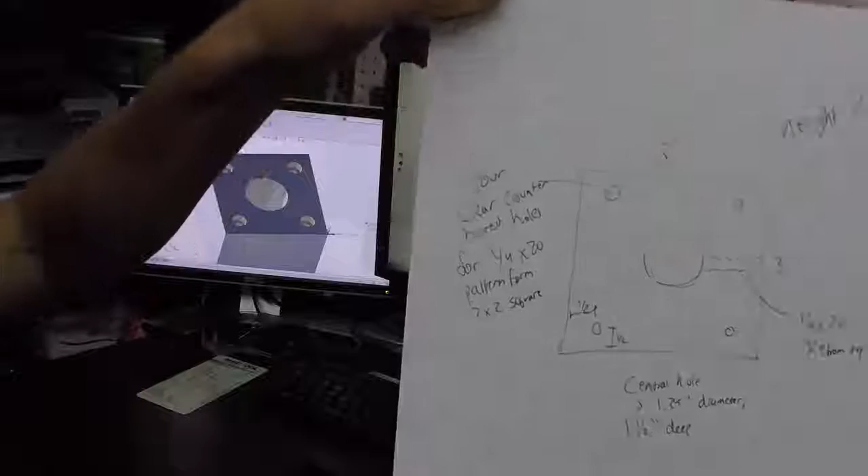We've got this part drawing right here. And this is exactly what comes in from a customer. It's not a perfect dimension, drawing, and tolerances. You've got to understand what they mean. So let's take this and let's go into Fusion 360 and let's model it up. But one of the things you've got to understand is the service you're providing.

Some of your customers aren't going to be machinists. They're not going to have perfect drawings. You've got to think for them and make sure you understand the questions. And in my opinion, you need to do that and go back to them with one set of questions. Don't come back to them 2, 3, 4, 5 times and say, hey, I keep realizing there was something missing in your drawing. It's not their fault that stuff's missing in your drawing. It's your fault if you don't go through it, completely understand it. That's why I like to model things up right away and then hit them up.

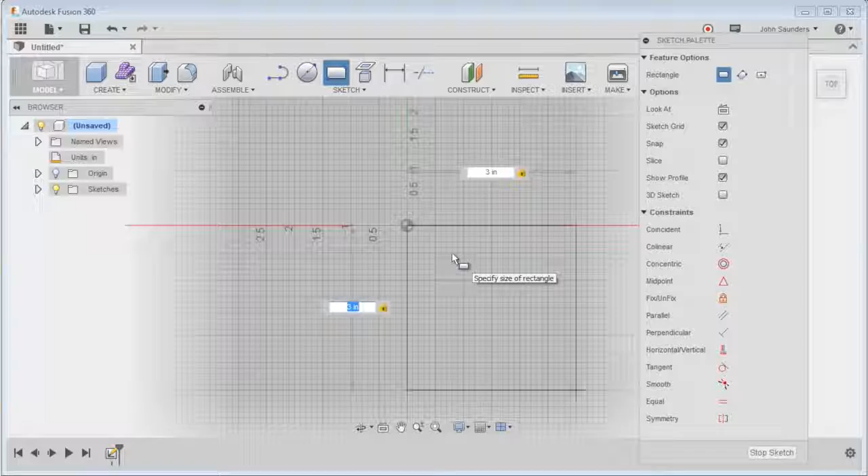Let's make the part. New sketch. Just drag here and it is 3 by 3. So I hit 3, tab 3, enter. Right click, press pull. I'm going to say this and -2. I hope that works. I forget. Yeah, there we go. Perfect. Now we've got our block that's 2 inches high. Now we're going to sketch a circle right here. It's going to be in the middle so we can actually create some lines.

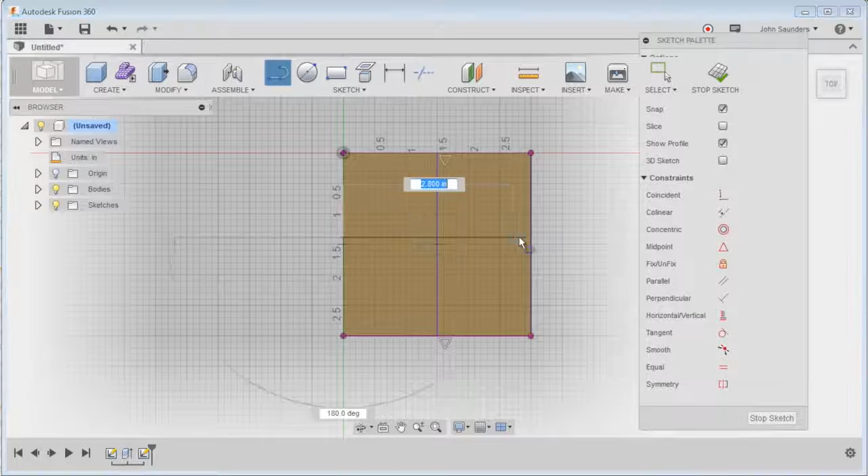Lots of ways again to do this. Oops. Kind of funny how, I mean, my videos don't bother me anymore at all, but you still get nervous.

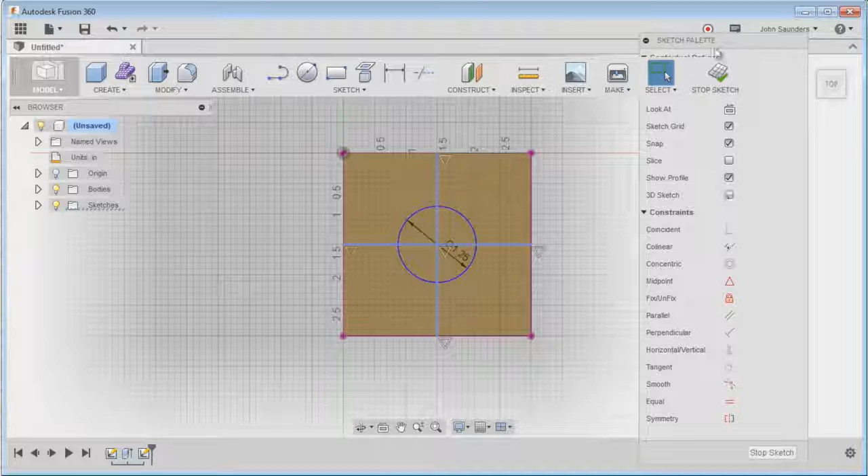So it's a 1.25 inch diameter hole. Great. We're going to click on these 2 lines and say over here for construction. Here we go. And then right click on this, press pull, and we'll say they said it's 1.5 inch deep, so -1.5. Okay, let's create those counterbore holes. The only way I know to do this is to sketch a point, which feels like it's not the right way to do it. Must be a better way.

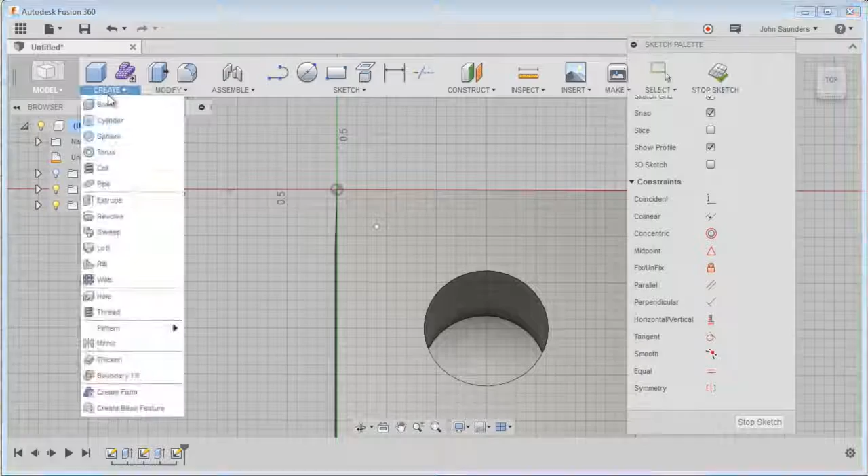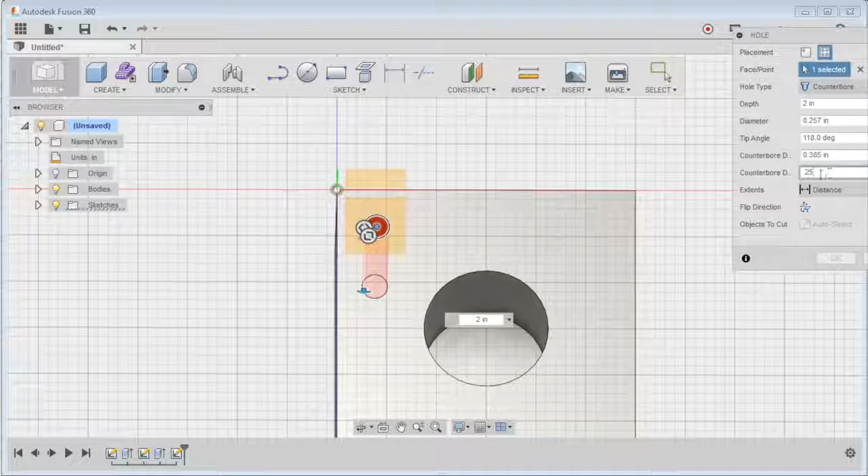But sketch a point and then do create hole, face point, choose our point, and we'll do counterbore, depth of 2 inches for 2 all the way through, diameter 0.257. We'll drill it with a letter F drill for clearance on a 1/4 inch bolt, and we know the counterbore for a 1/4-20 socket cap screw should be 0.385 and 0.25 counterbore, or sorry, 0.39. Click OK. Now you've got one all the way through.

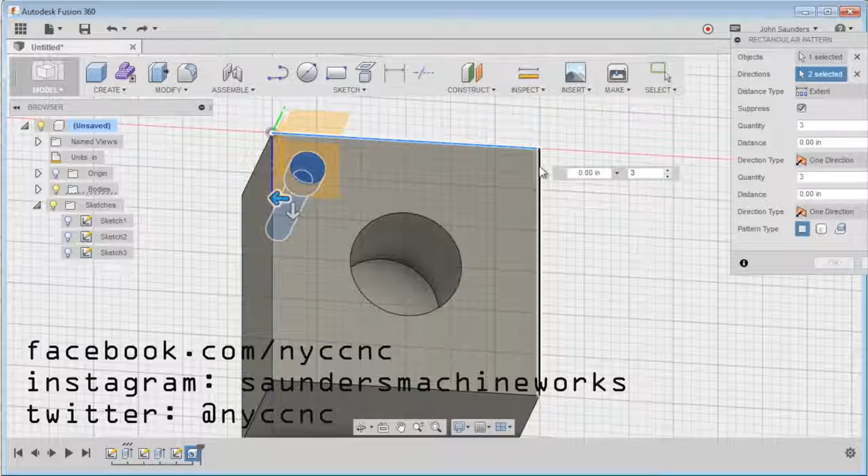Let's create the pattern. Create pattern rectangular. Now instead of clicking on it, I would suggest choosing the option down here. That makes sure you select the whole thing, and then directions. Click there. Click there, and I just go over here, quantity 2, distance 2 inches, quantity 2, distance 2 inches, and you see we're wrong there, so if we just go distance, I think -2, we'll get it over, perfect, and click OK.

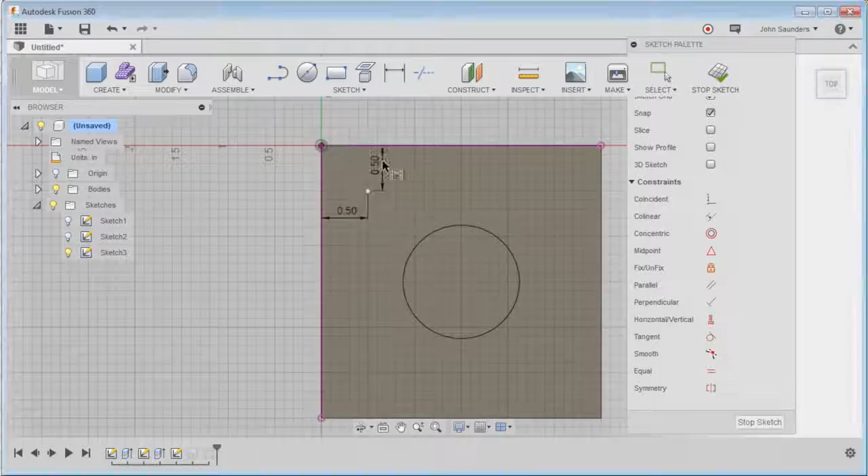Now we've got our pattern, but you see it's not centered correctly, so let's go back and right click on this sketch, edit sketch, and now we can just dimension this first hole, which we know from the drawing is 1/2 inch over and 1/2 inch down. Stop sketch. Now we've got that, and the last thing we need to do is put a hole over here.

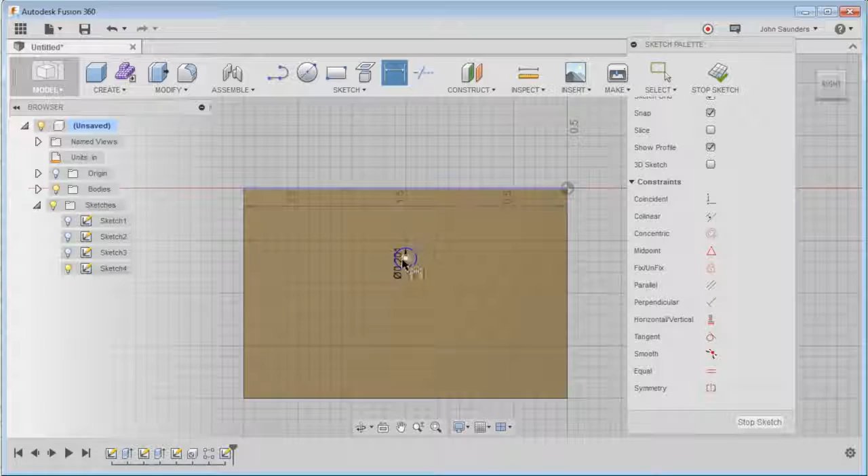So we'll do sketch here, and we'll come over to the halfway point, and that's 0.201 would be the thread, would be the drill diameter, and we'll just sketch it down 0.75 from the top, and we will then stop sketch, right click, press pull, choose that little guy, and what we can do here, it actually is kind of quicker, just go up like that, click OK. And now we've got our part model. All right, CAM.

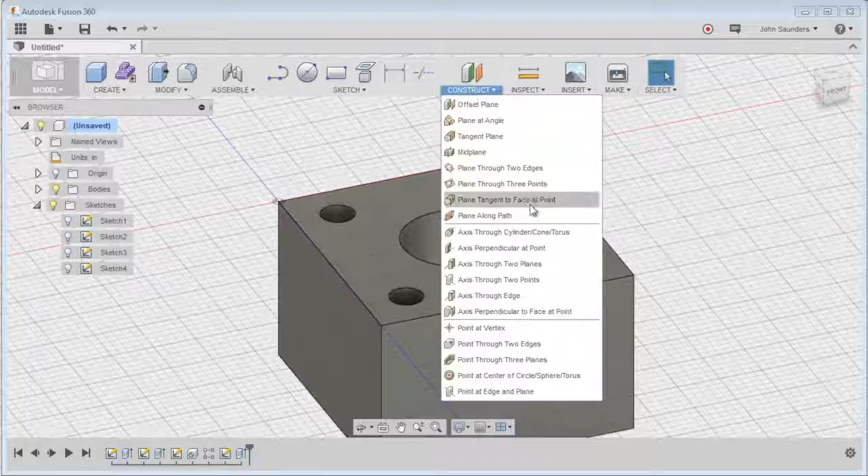I know right now I'm not happy with Fusion 360 in the coordinate system, so what we're going to do while we're still in the model is construct axis through cylinder and click right there. That creates a line right through the middle of the part.

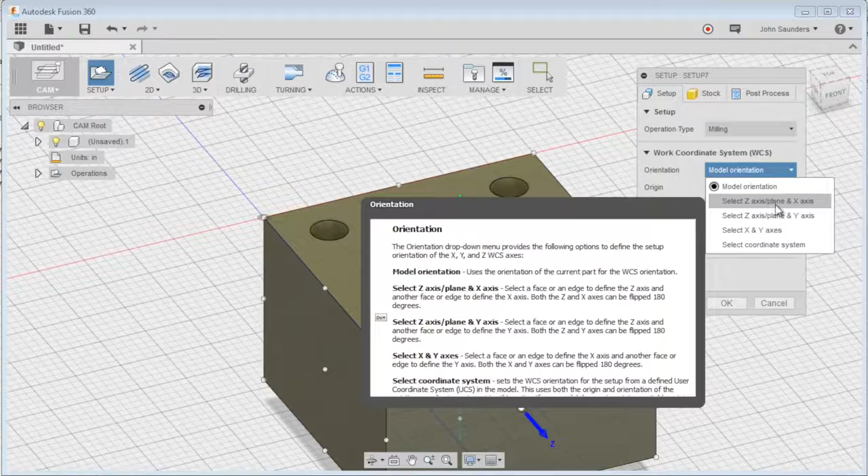Now, model, CAM, and we're going to set up a job. So click Setup, New Setup, and Orientation. I'm going to change from Model Orientation, which is somewhat arbitrary, and I'm going to choose Select Z-Axis and X-Axis. Z-Axis we know we want to be this guy, pointing down in the wrong direction. So if I click flip, that actually is exactly what I want.

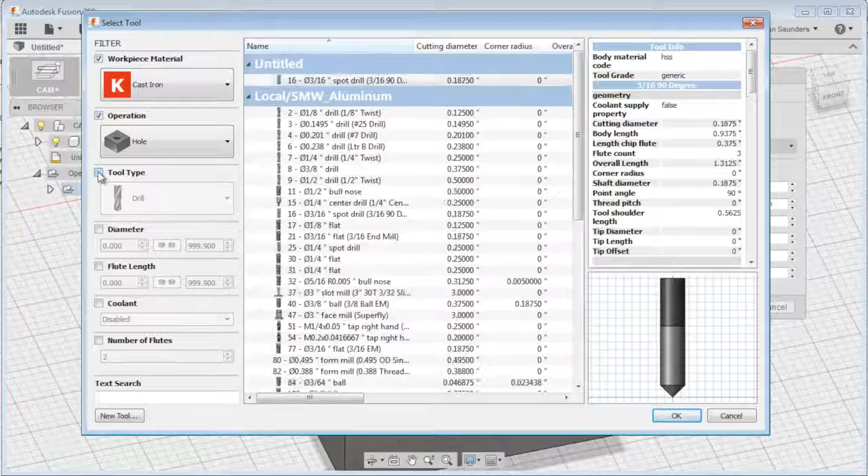It's on the top, and I always laugh, but if you kind of do point your arms up in the air and bring them down, that's Y positive and X positive. Click OK. We're going to start off with a drilling op. We're going to do tool, uncheck the filter. 16 for me is a spot drill. 1, 2, 3, 4, 5. And we're only going to feed down from hole top, negative 0.1.

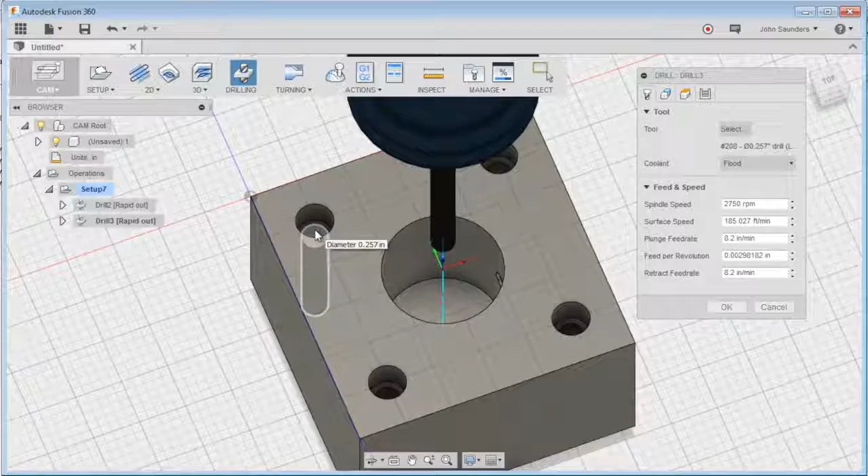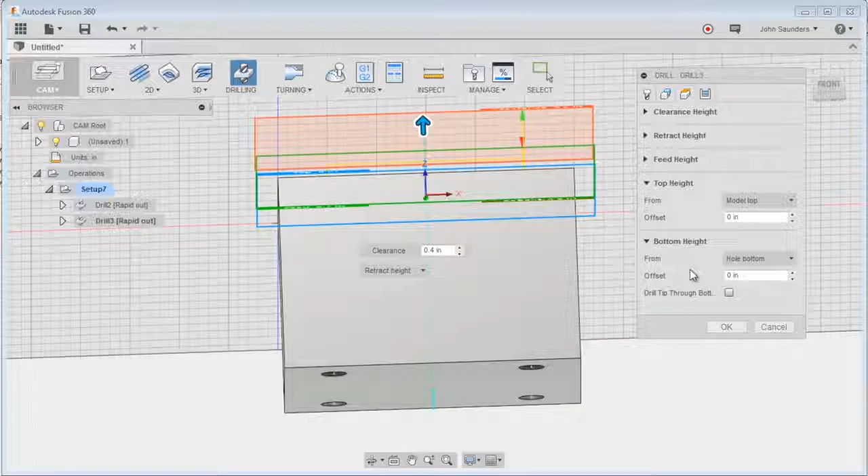Okay. Another drilling op. Tool 208 is a letter F for me. I think we might get a post issue with tool numbers above 200. We'll see. 1, 2, 3, 4. Now here I got to be careful. I want to go and change the height from the model top because otherwise it would rapid it into the part I selected, which is the 1/4 inch down, which would not be good. And bottom height, I want to go just negative 0.15 to make sure I go all the way through.

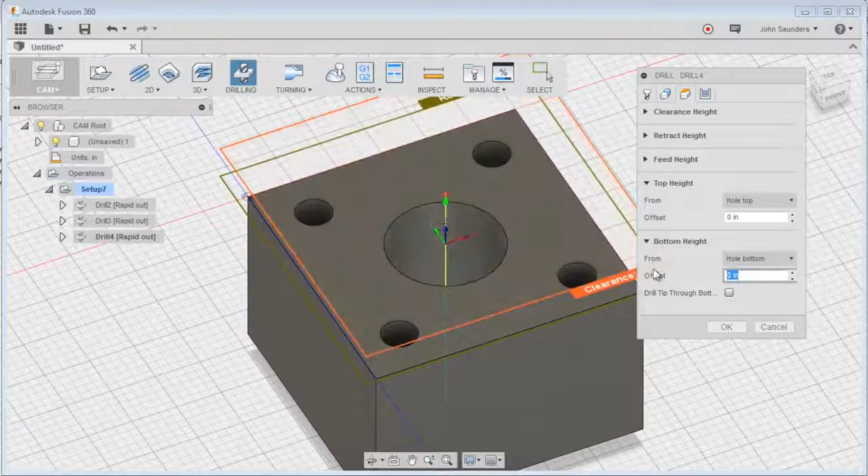I'm going to now use a 1/2 inch drill to remove a lot of the material from that center hole. So tool 9. I love this recipe. I talk about it a lot. 1175, 5.5. Click here. And what we're going to do here is hole bottom, but 0.05. We don't want to go all the way to the bottom of that hole. Leave a little bit of material. This one, we want to do a full retract. There we go. Peck of say 0.1 should be fine.

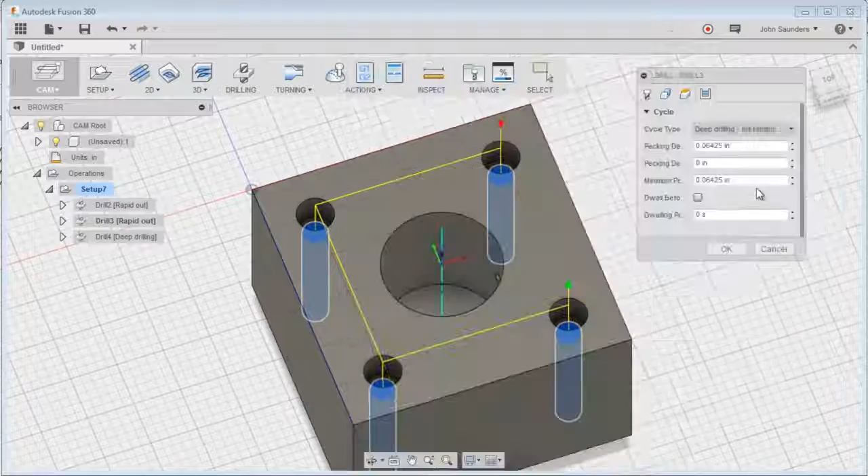Now we actually want to go back. This is very important to peck that letter F drill. I forgot that. Full retract, 0.06, that's fine. Looks like that's some formula of diameter, which is perfect.

Okay, now the next thing we've got to do is get out this material here. So let's use the hog shear. I had the tool in my SMW library, so I went to Manage, Tool Library, and I just re-imported my same library, and now that tool is there. Don't know why. Normally I felt like it updated live based on whatever was in my tool library, so I'll have to pay attention to that.

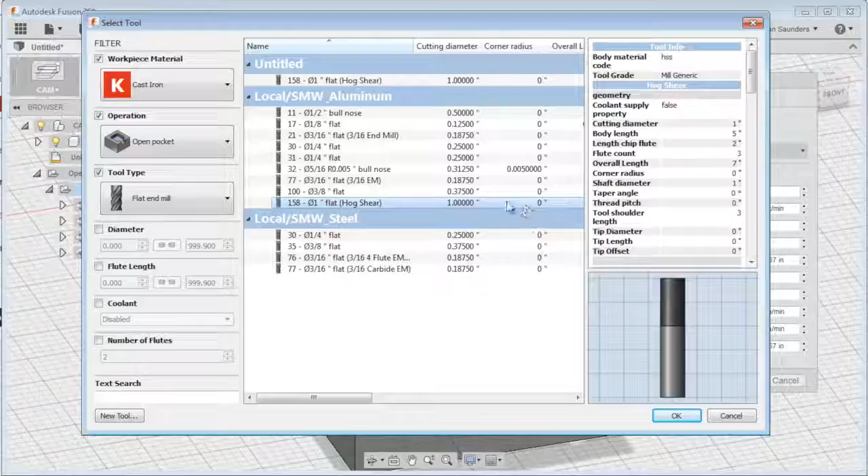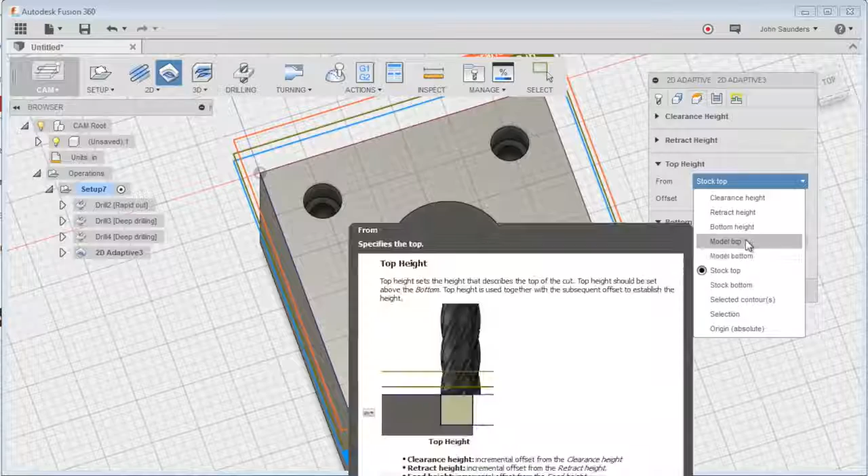But now 2D adaptive clearing, tool, and we'll check the hog shear, which, just so we see, we're going to run at 5100 and 30 inches a minute. We can plunge and ramp at the same, by the way. Should be fine. We'll choose this bottom ring here, but what we're going to do is top height, selected contours. I hate stock top. Model top makes me feel better. And we will do stock to leave 0.010. Now, I'm probably not going to get a tool path.

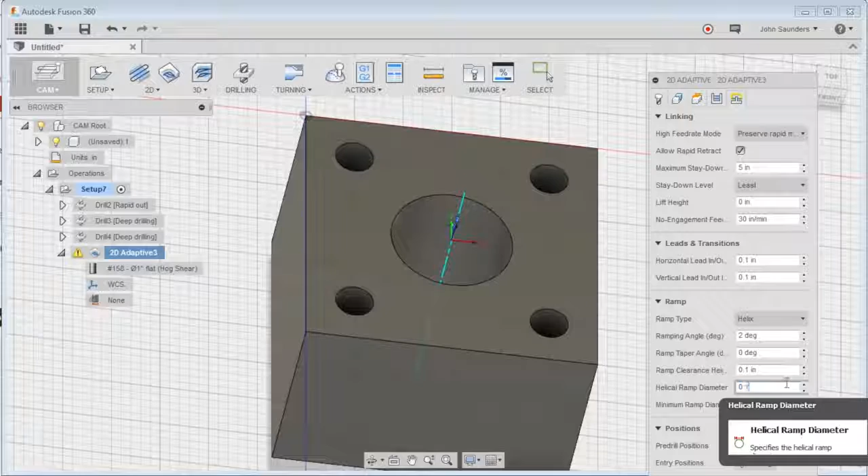Right, because it's trying to ramp in at too wide a radius. So if we go down here to the ramp helix, we've pre-drilled this to 1/2 inch, so you could plunge, and in fact the hog shear can plunge, but let's do this. Let's change the helical ramp diameter to something pretty small, 0.1. Let's see if that'll let us, any sort of helix is better than a straight plunge, and sure enough, that's great. It's going to take forever to get down there like that though, so let's increase the ramp pitch or angle to say 10 degrees.

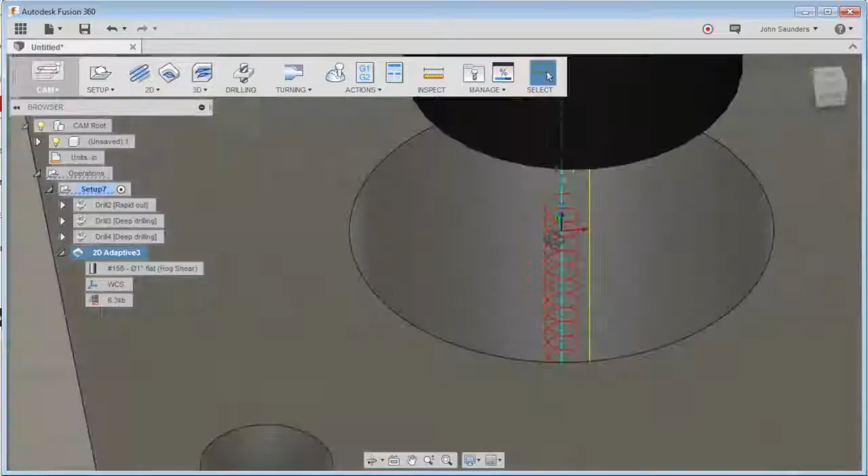Perfect. I like that. Now, we can't cut this in one depth of cut, so one last edit is multiple depths, and I forget what the exact step down is, but we'll say 0.3 multiple depth, and that should do the trick. Looks like that. And let's just see how long that op is.

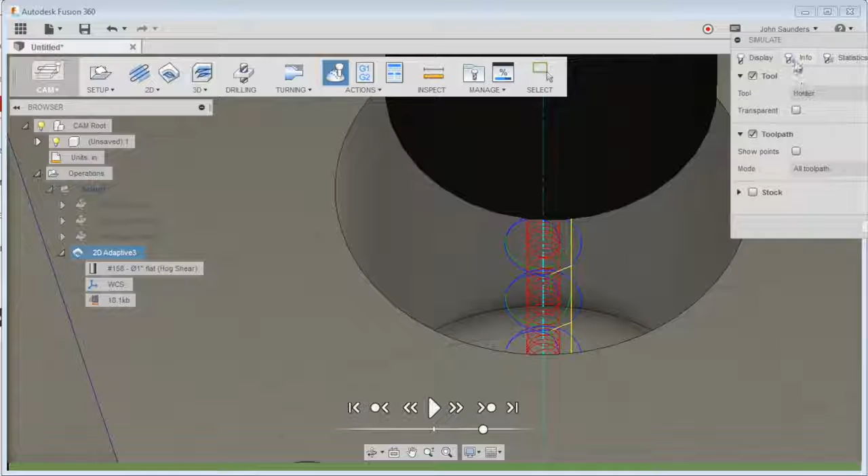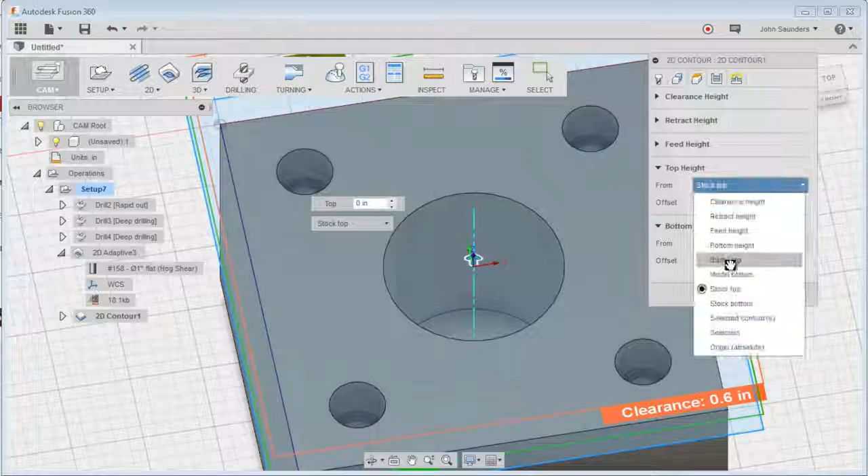One minute machine time. Actually, a little longer than I thought. Anyway, okay, now we need to come clean this back up. So 2D contour, and we will choose tool 100, which is a long 3/8 inch end mill, and that's going to come in and do the cleanup, and we will say, again, model top, and I think we should be fine. Depending on how much stock you leave, you could do it in 2 passes, but I'm always conservative. We should be fine with 1 pass.

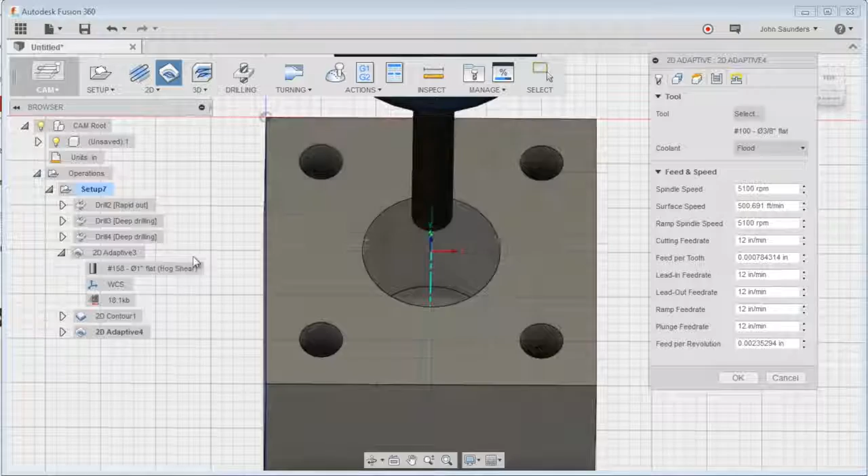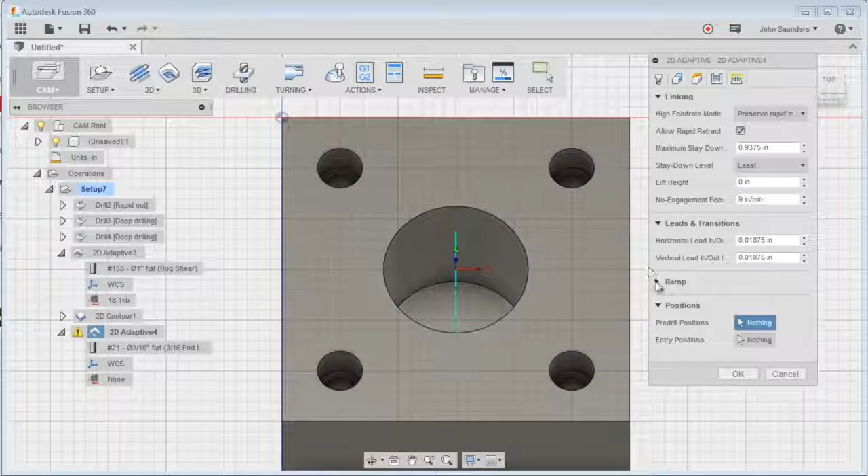And then let's come in with say 3/16 and clean out these pockets. So we'll do 2D adaptive clearing, even though you could do a 2D contour. 3/16. 1. Okay, so let's do it this way. Click 1 just to show you. Oop, we're not getting a toolpath yet. I'm sure it's the same thing. Ramp. Let's change it down to 0.1. Usually if you're not getting a toolpath, that's why. Looks fine. I'm just going to increase the plunge angle. 10.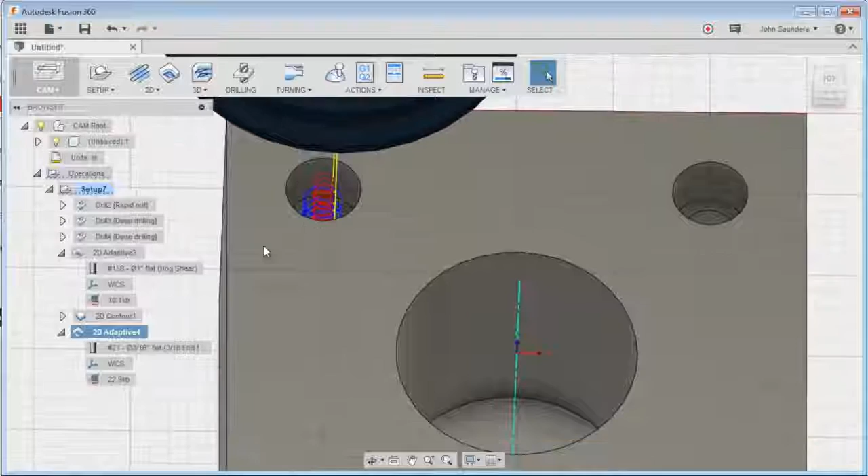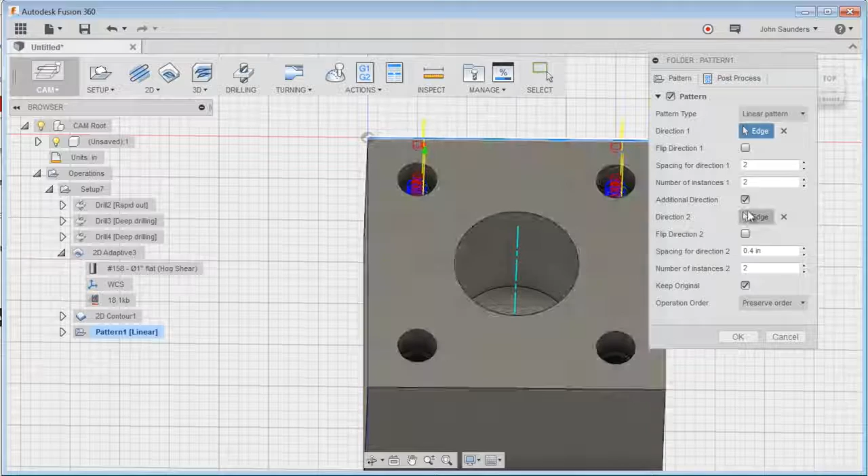Perfect. And then what you can do is right click, add to new pattern, and we'll just choose direction 1 will be there, linear pattern, yep, 2, and number of instances 2, and you should be able to do additional direction here, 2, 2, flip direction 2, just a different way to do it.

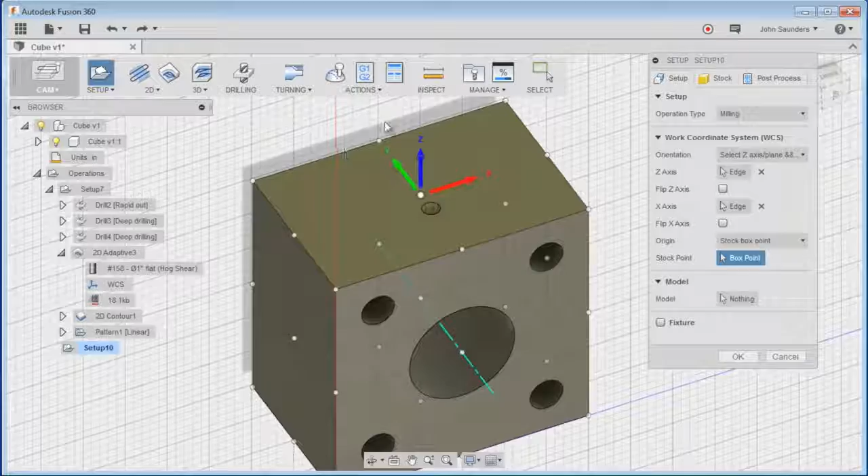Last hole, that side quarter 20 tapped hole, so we'll do setup, new setup. Now again, I just don't love how you create the XYZ origin, but I'm sure we'll get this to work. So we'll say again, select Z-axis, plane, and X-axis. The Z-axis would be something like that, and the X-axis will be that. So that will mean we have to put the part in the vise like this, which is fine. We do need to pay attention, obviously, so that means that the part is going to be drilled on the Y negative. So click OK, and then it's pretty simple.

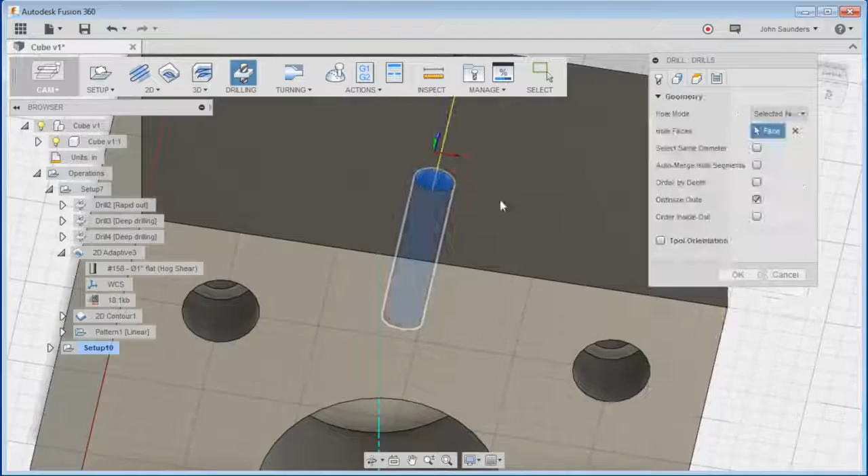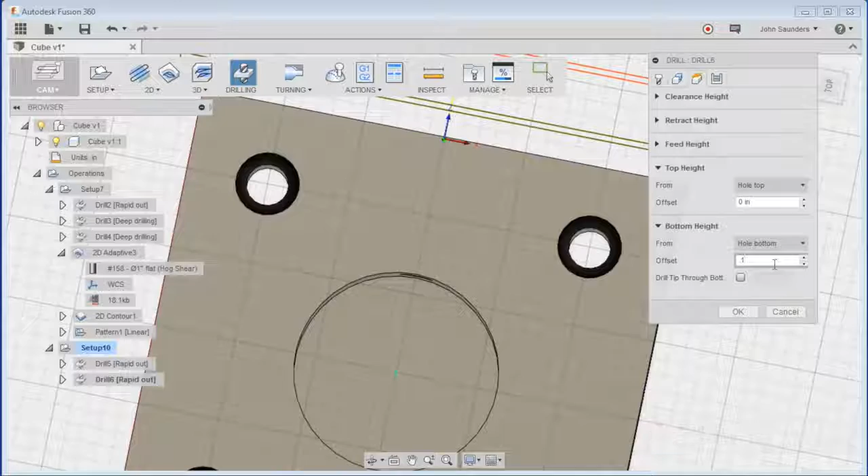Drilling, select 16. And we'll just have that be from hole top, negative 0.1. Drilling number 4, just like that, and we'll go all the way through. You can see it poke through right there, and we will do deep drilling, full retract, that's fine, and we are going to tap this a new and different way. Stay tuned.

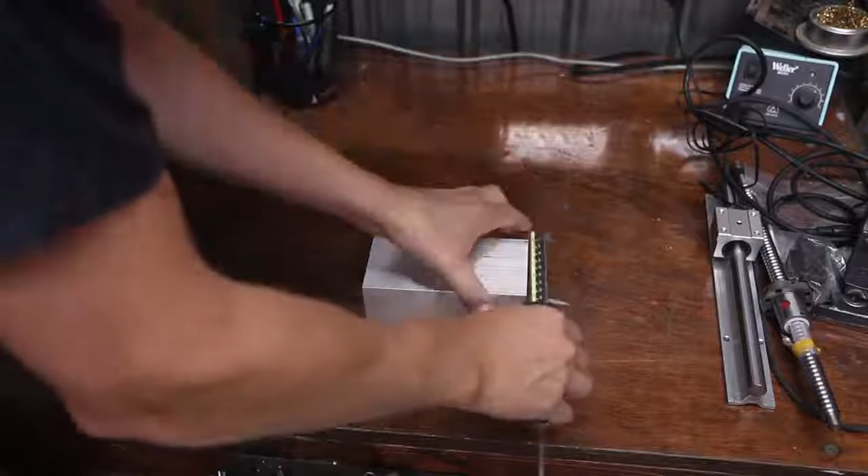Unfortunately, I can't justify buying a whole 12-foot stick of 3-inch by 3-inch aluminum, so we had to order this from McMaster-Carr, which just gets built into the customer price. Let's see, the big question is, what's the dimension on it? Perfect. So we actually have about 11 thou extra. The customer, I know, wouldn't care about 8 on that side. They wouldn't care if it were a couple thou undersized, but we do, even though that's a pretty decent finish, we want to clean that up with the Superfly.

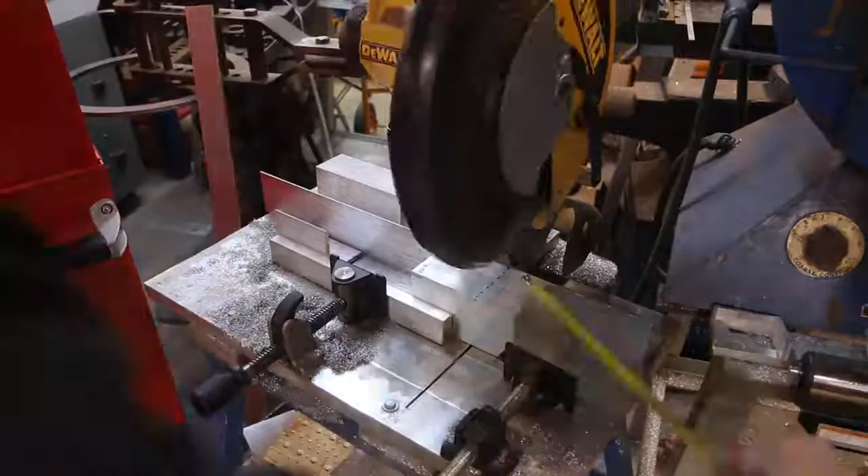All right, set the part up in the DeWalt DW872, one of my favorite pieces of equipment. Make sure you leave enough material to square off on the machine. Still makes a really square cut. Part is cold, good to go.

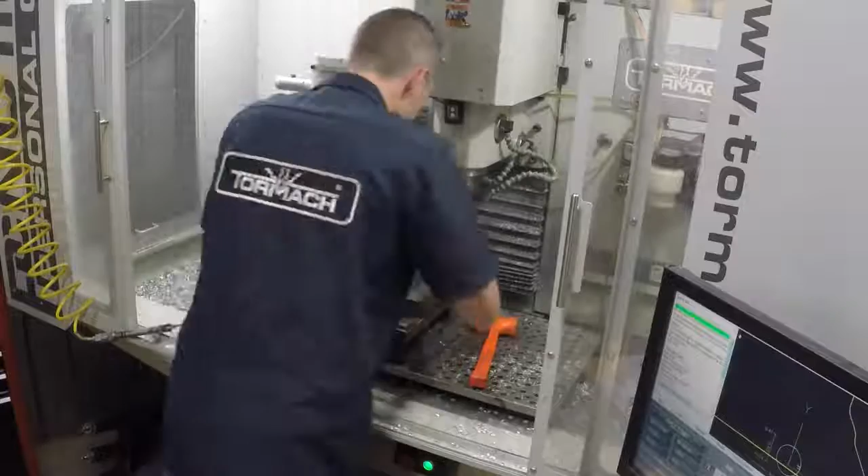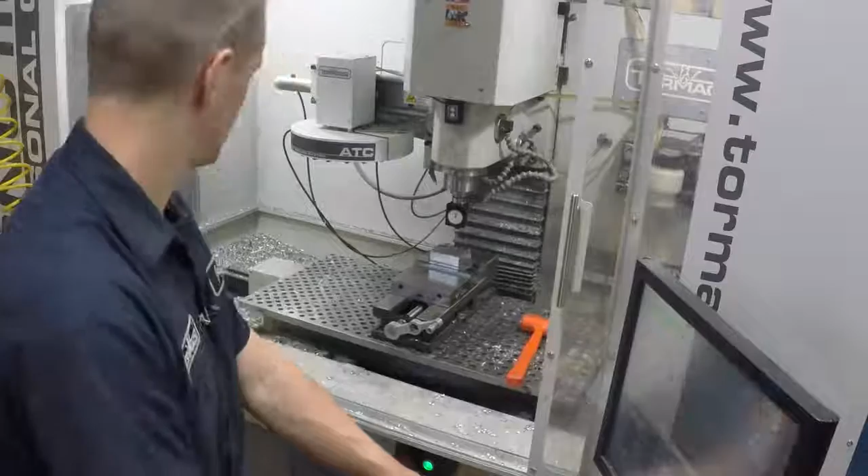Throw it in the Tormach, and what we'll do here is use the Haimer, and hopefully you'll be able to see just how quick it is. I love having the touch screen. We're just going to go down to the side and hit negative 1.5 because we know the part's 3 inches wide, and then negative 1.5 on the back side as well. Check it. Looks good. I always do my sanity check. Start off with tool 16. Again, quick sanity check. And here we go. Let's rock and roll.

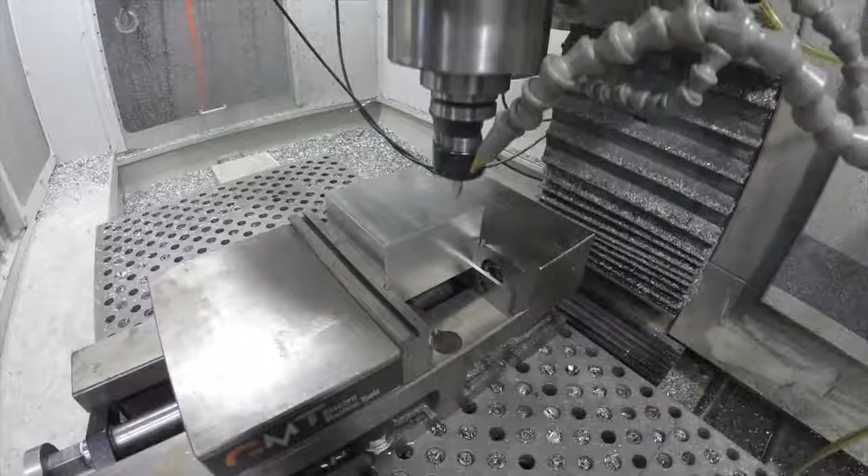Spotting 1500 RPM, only 2 inches a minute, pretty slow. I only went down negative 0.1. Should have gone deeper. You actually want to get into the actual angle of that center cutting tool. Letter F drill. I like this recipe. It does bird's nest a hair. 2750 on the RPMs, 8.2 inches a minute. I may actually need to feed a little faster, and we're pecking about every 50 thou.

All right, here we go with the Shear Hog. It can plunge. We have pre-drilled, so that should help. We'll see if it's too aggressive. Ooh, okay, bogging down. Yeah, let's back off that feed ramp in a little. All right, backed it down to 20 inches a minute on the feed in. We had no problem at 30 on the last part we made in that video, but we have a lot more width of cut as we're plunging here. Much better. That sounds pretty good. Bogging down a little, but I'm willing to let this run. I love this tool.

You don't get chip weld. That's the amazing thing, because it's this single insert tool. I've got the coolant blast up high on my Trico system. It really evacuates the chips. It is great. You guys tell me, is there a better way to clear a 1.5 inch pocket like this? Or 1.25, I guess?

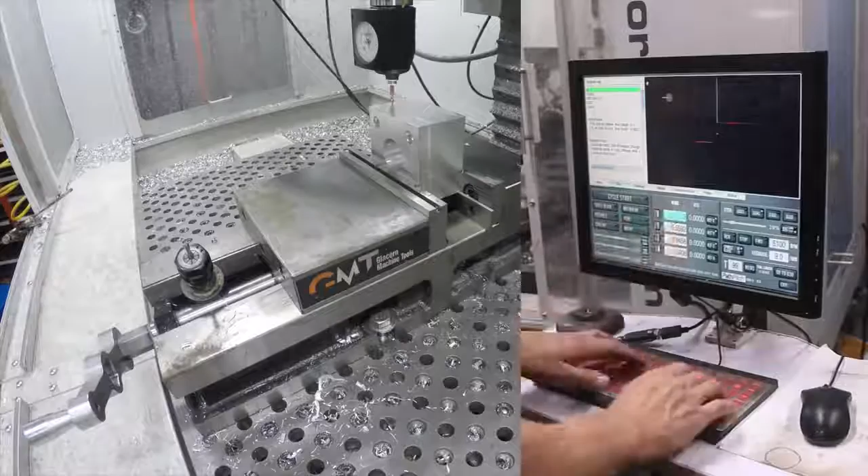Pull the part out and then we'll flip it back up. Remember, make sure it's pointed towards us. Double check your model. One smack of the hammer, and then what we'll do is throw the Haimer in, and we'll quickly go grab -1.5 on the left side of the X. Touchscreen makes quick work of this, folks. I love it. +1 on the back side with the Y, and Z0.

Spot it, tool 16. Again, should have gone deeper. Lesson learned. And then a quick run through with the drill number 4 for me, which is a number 7 twist drill, .201 for pre-drilling 1/4-20. Little cutting fluid and more to come, folks.

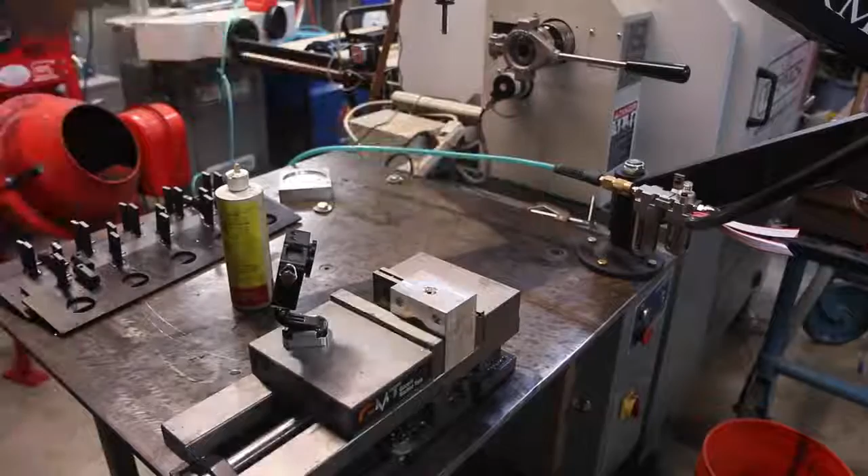I am really excited on this, but we have a flex arm. Actually, it would help if I tighten down the vise first. We've fabbed up a little table for it. We've got a couple of different vises for it. I'm really excited. We actually had a chance to go up to the factory and meet with the folks on FlexArm. So we're going to do a short video on that with a story behind it. Super useful tool and an interesting conversation.

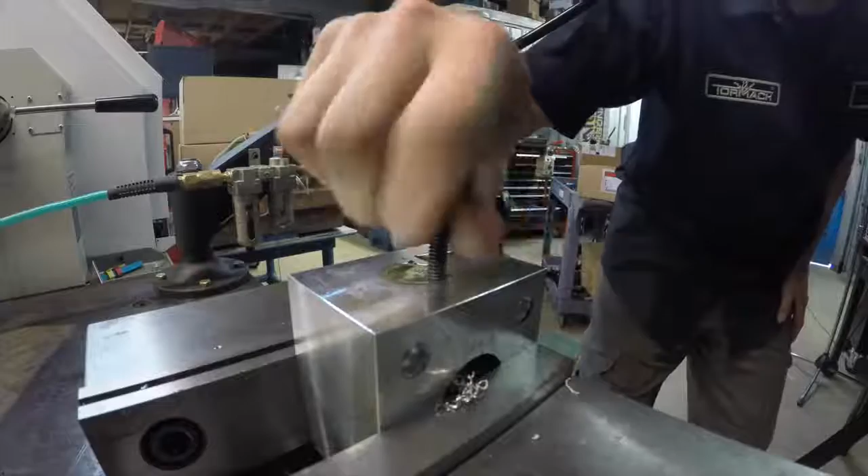As you can see here, do you tap offline? I would never run the tap that deep, and probably rigid tapping, definitely not with a compression tension head. So a lot more to come on that, but I love it. Grab a test socket cap screw, great fit. There you have it, folks. That's a quick job shop job.

I hope you enjoyed. Here's my takeaway for you guys. You don't need crazy, fancy, expensive equipment, especially if you can't afford it, to get started or even to do any sort of work. Go look at the guy Clickspring on YouTube, relatively new channel, crushing it. Sherline lathe, the things are hundreds of dollars. He is crushing it.

Go look at a guy like Keith Fenner. I consider Keith a friend. I don't think he'd mind me saying this. His equipment isn't worth that much. At auction, it would sell for thousands of dollars for that lathe or that mill, Bridgeport, because they're older, they may have some backlash in them, they're not commercially in demand anymore. But guess what? Keith does wonders with those machines. It's the carpenter, not the tools.

Folks, someone just emailed me saying, hey, I can get this loan approved, blah, blah, blah. Look, I can't tell you what to do, but I think you're an idiot if you don't have experience or guaranteed revenue and you want to take on debt. Save your money, start small, do great work. Take pride in your work. I wish I did it every day. I try to. We're all human. We don't do it every day perfectly like we should, but it shines through.

Customers love it. Deliver a great product to your customer. They'll talk about it. It will grow. It might grow more slowly than you would like. But again, that's how I've chosen to grow, and that's a question a lot of people ask me.